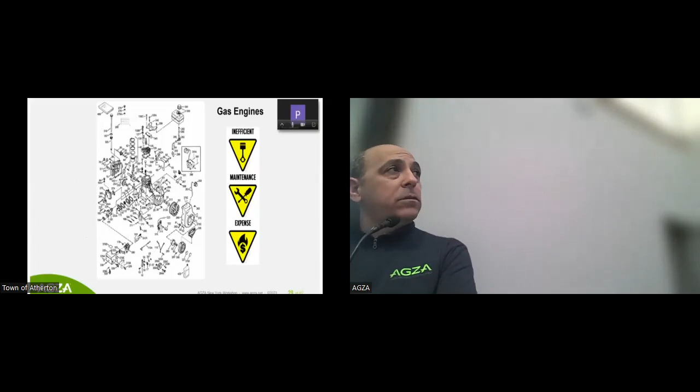So this is a Briggs & Stratton diagram of a Briggs & Stratton engine. This is what I used on my go-karts, my mini bikes, and my snapper lawnmowers. Compared to electric, it is more inefficient in the way it produces torque. It requires more maintenance, and it's definitely more expensive.

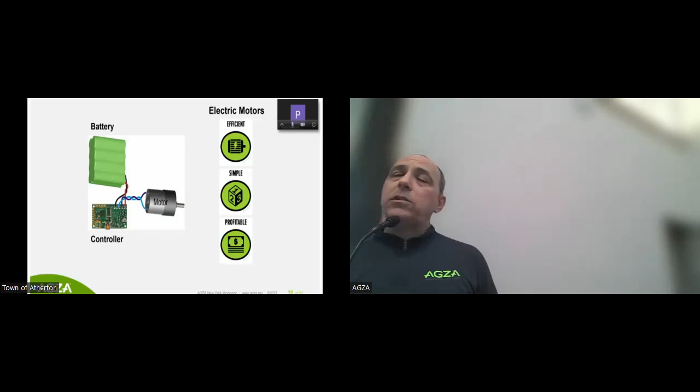The technology you see right here is about this simple. You have a battery with a battery management system, you have the controller, and they're basically programmed to tell that motor what to do. That drives the turbines in these blowers, the string on the weed whips, the blades on the mowers. It is a much more efficient technology. It's more simple. It can be more profitable.

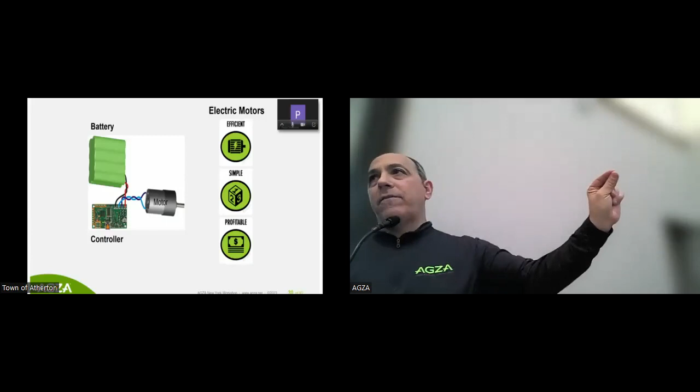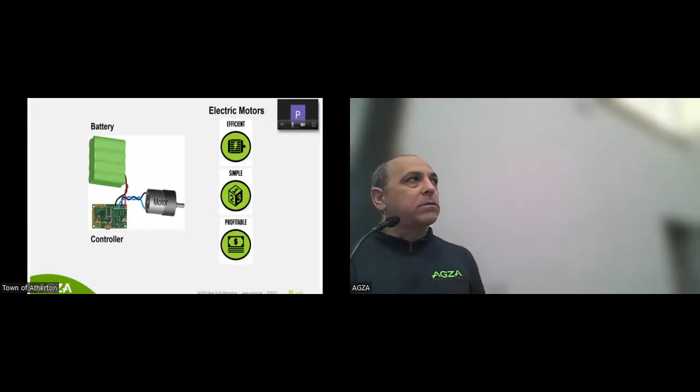And when I say the word can, it can be disastrously unprofitable. Now I'm going to explain. If there is not worker adoption, and they're not taking care of the tools because they're so much more expensive, if they're not taking care of the tools, it can be a very unprofitable endeavor. But if you can get these tools in year 2.5, 3, the handhelds, you should be in the clear and you're going to get into that gravy period.

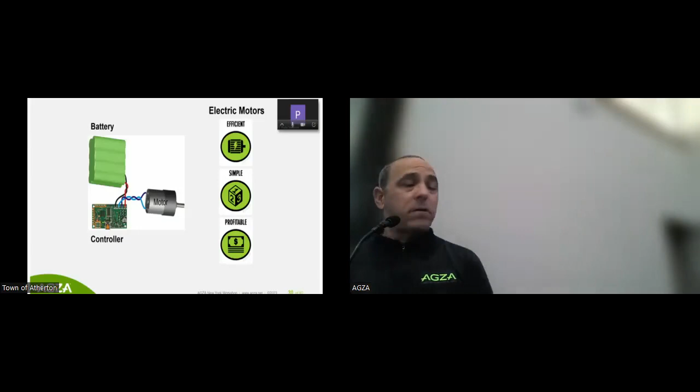It's not just about the tools - education and training are essential. Contrary to what people say, you're not just using this, charging it up and pressing a button. This workforce really does need to understand they're using an entirely different technology to meet the same end, and that means aesthetic acceptability. The last 4 or 5 decades, we are accustomed to hyper manicured aesthetics. People associate that aesthetic with property values. We are now beginning to achieve that same aesthetic without gas. However, we feel that ecological approaches should be considered in that.

Okay, institutional programs, just some examples. This is AGZA Green Zone certification. We have 4 different levels. Level 1 is just phasing out all 2-stroke tools. Why? Two-stroke tools, they're the most noisiest. They're the most harmful to worker health. And you have to put two-stroke oil into the gas and mix it up. It's very achievable to phase out two-stroke equipment for routine maintenance.

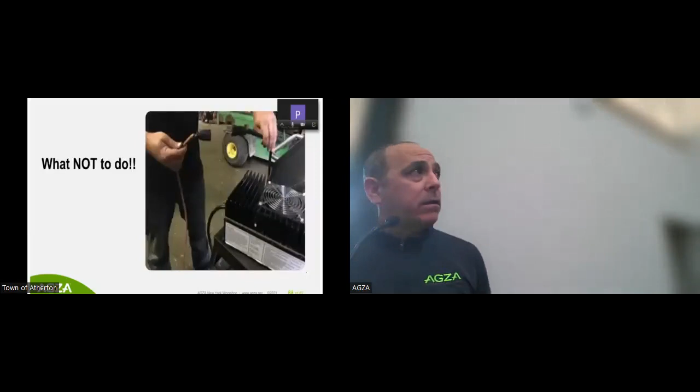You know why? Because they didn't want to do it. They were forced to do it. Large mower. This is a charger that pulls 35 amps out of the wall. I go there, I touch that thing, it's a damaged homeowner extension cord.

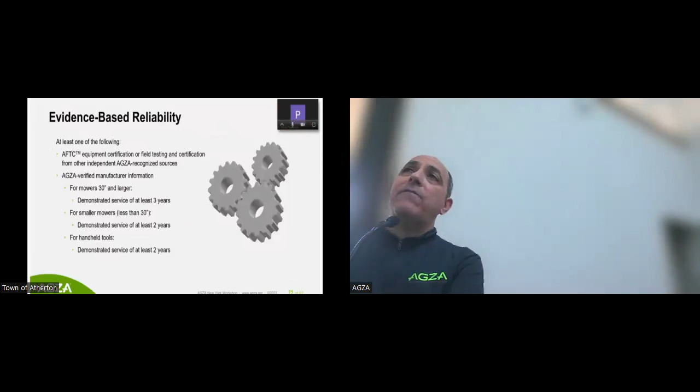If you're going to purchase anything, whether you're a homeowner or a professional, make sure you do it with a credible dealer - someone who's been in the community for a long time, someone you know you can trust who's not going to give you the runaround on warranties. You should gather evidence-based reliability from peer-to-peer engagement. Don't take AGZA's word for it - ask questions, try to get as much information as you can before you purchase something, and research the warranties before you purchase, both as homeowners and professionals.

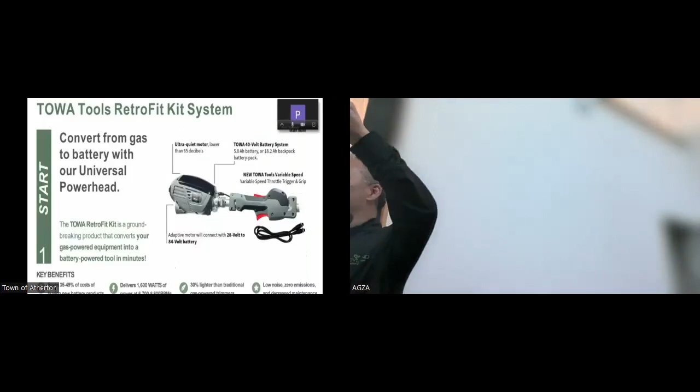So our first is our retrofit tool. Again, we'll convert any gas 2-cycle engine by just removing the power head, the gas engine, and putting the battery power head on. We have multiple adapters, so we're brand agnostic. Whatever brand you have, you put that adapter in place, and you may now put that on your new tool. Again, 40% savings by converting it.

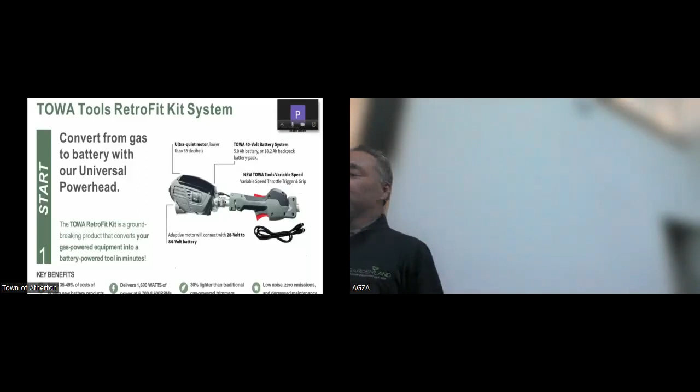We also have a product up here, if after the presentation you'd like to see it, we can show that to you as well. So you go from a gas product, the dirtiest product you can have with a 2-cycle engine, to a completely low noise, zero emission product.

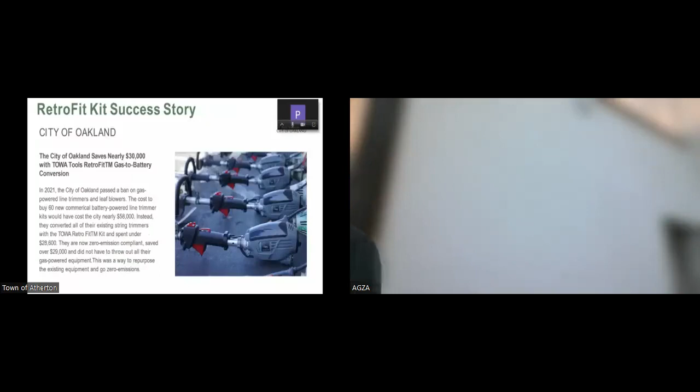City of Oakland, they had to convert literally overnight. They decided the city was going to ban all gas equipment in their crew, literally overnight. They had over 60 of these tools laying around that they just bought, only about 1 or 2 months old. We converted all their tools and saved them 40% of the cost of having to replace all that stuff with battery.

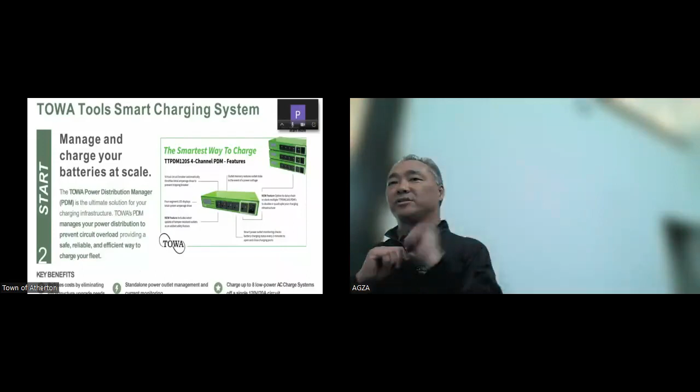TOWA's smart charging system, this is the PDM that we talk about. We believe it's the smartest way to charge. Literally, it's a channel manager that you can plug into the outlets. You can add as many outlets as you need, and we will never let you blow your circuit.

What's unique about that is the only other way to do it is you physically have to rotate all the batteries yourself, and trying to do that all throughout the evening just isn't a scalable solution. The other way is you add more outlets.

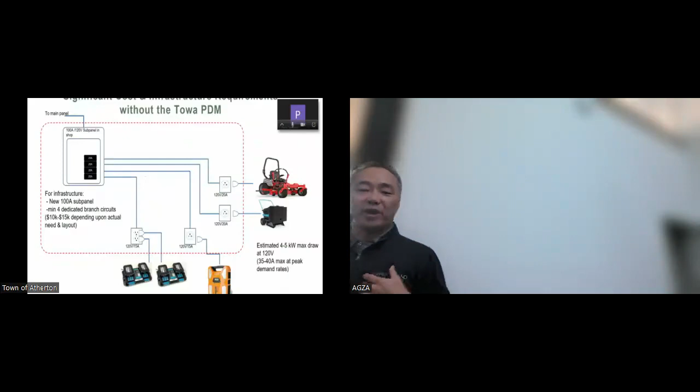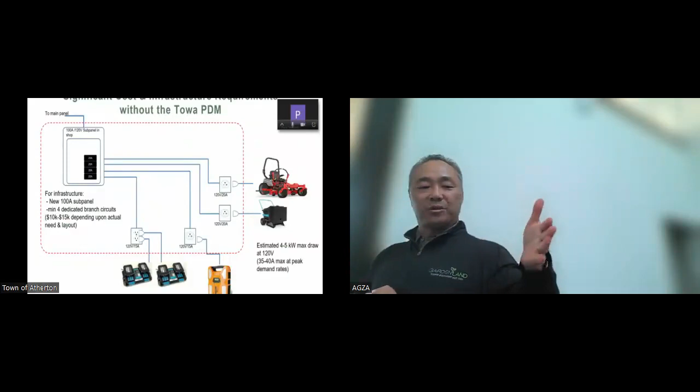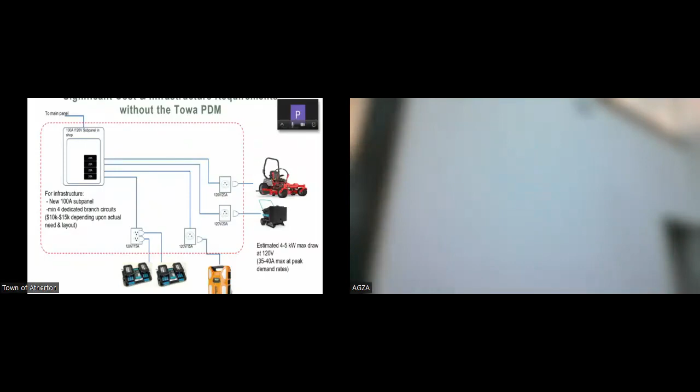So this is what you would have to do today if you were to add, let's say, all these pieces of equipment here. You notice we have 4 dedicated outlets, and those outlets then charge all this equipment. You would need a new 100-amp sub panel, 4 dedicated 20-amp switches just to run basically those 5 pieces of equipment. Now imagine you multiply that by all the tools in your city or school or wherever you're servicing, because you now have to go 100% battery. Can you see where the cost impact happens there?

And that's only bringing the power panel to wherever you're at. You still have to bring in the service, and in some cases, bringing in a new 100-amp panel service to your location may not even be possible.

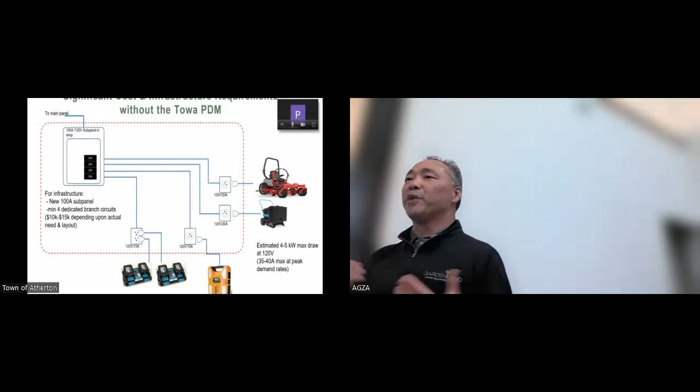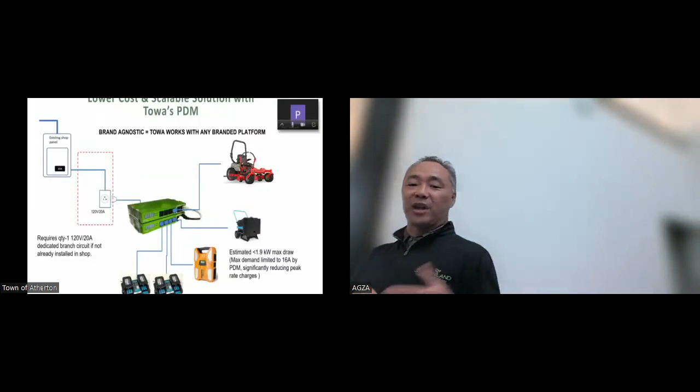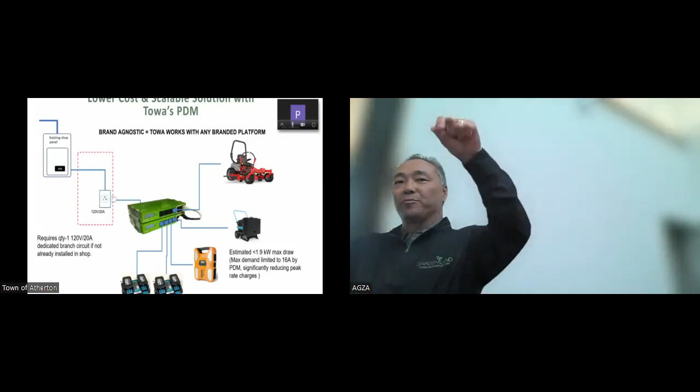With the Towa solution, we take one circuit, you plug in our power manager device, and now I'm managing all 5 devices essentially with one PDM. And if you want to scale it, you just keep adding PDMs, tethering them together with a link that allows you to scale up and down.

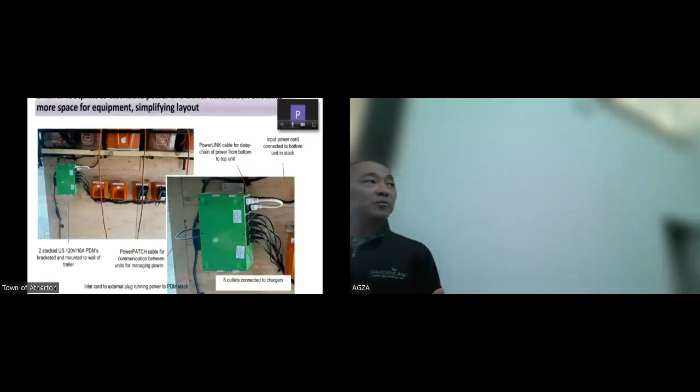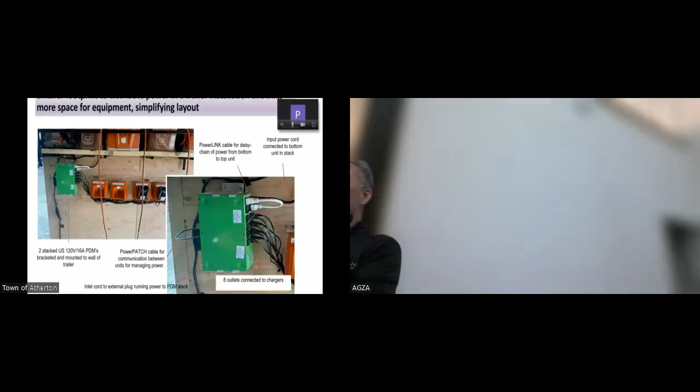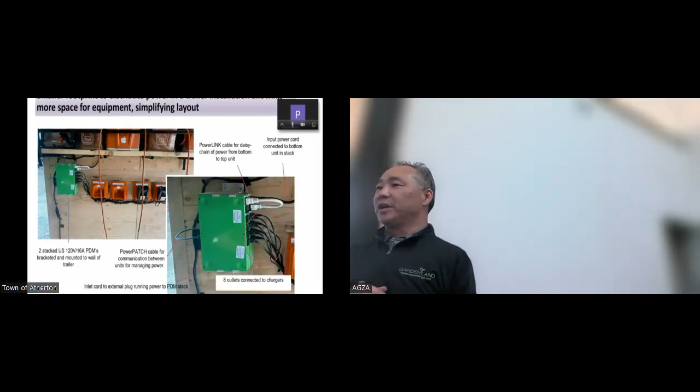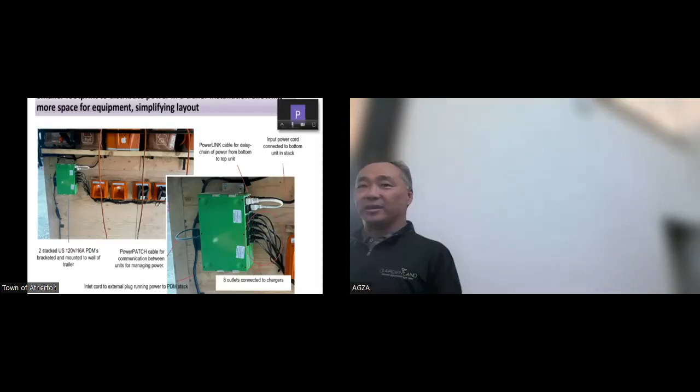Here's some examples of commercial users that have put these into their trailers, and now they've been able to charge all those batteries that are in their trailer. So now they have one cord coming out of their trailer, it goes into the wall, and that PDM manages everything in their trailer. It will never let you trip the circuit, so you have a much safer charging solution. It's not like the picture Dan showed earlier where we got all these extension cords plugging into everything, trying to charge all these devices, and then having to rotate them all throughout the night to get it done.

A couple success stories in our view: a landscaping company that went 100% battery, no gas. They started out with 2 trucks, we helped them convert those 2 trucks, and now they have 8 trucks running 100% battery. They use our Towa PDM to charge up each of their trailers, so now they keep everything in their trailer. It's one outlet out of their trailer charging everything versus having to bring all the batteries inside the shop and charge everything up at the end of the day.

If you think about other landscapers out there who live in apartments or rent a home, it's just not possible for them to bring in PG&E to add 3 or more 100-amp panels in their building. They have no way of doing it today. That's what we have to think about as we try to provide this transition for our landscapers—they need to have the ability to charge.